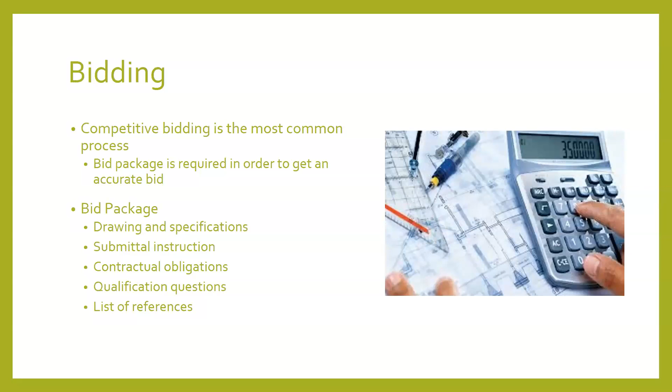Sometimes it's been a while since you've done a particular kind of project, but if you've got a list of those projects and who you worked for, people, if they're happy with your work, they're happy to give you a reference, even if it's been 5 or 10 years.

So these are some questions for you all. Who completes the bid package? Think about that. You've got the architect, a project, talked about that. And then now, who puts this all together?

Isn't it the owner? Owner and the architect? Yeah, good. Yeah, they usually work on that together.

Who solicits the bid? The owner. Yeah, same folks. So soliciting the bid means advertising it. So if it's a public project, there are requirements that it go out in a public notice, in newspapers, and then usually there's a time frame that it has to be advertised. That's the owner's responsibility.

And then what is the contractor's process? That's kind of a weird question. What do I mean by that? In other words, you as the contractor have seen an advertisement and you're interested. What do you do next?

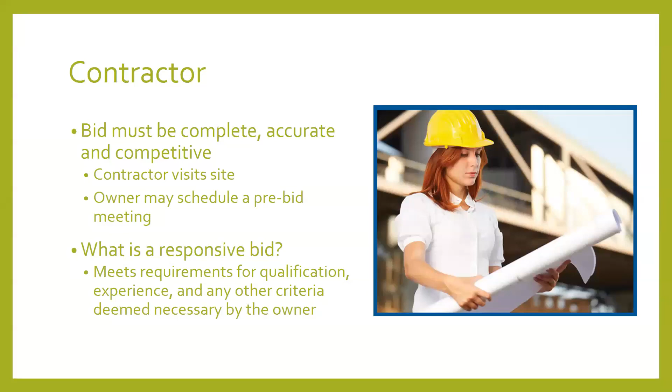Yes, definitely. Experience is another thing, you can't BS that one. Sometimes, on projects I've worked on, the contractor of record may not have all of the qualifying experience, but they'll bring on a partner who does. And that's legit, because it allows you to bid on something you want, and gives you that experience for next time. But you got to be upfront about that. You got to include that other contractor because they're going to help you get qualified for that project.

So how does the contractor go about finding a project? I think if you're a contractor here in Ketchikan and you're good, you won't have any issues finding work, just word of mouth. Yeah, that's a big one in Juneau too.

Press releases, the bid announcements. So I was mentioning that all public projects have to publicize in the newspaper or some other means, so keeping an eye on that's really important. Sometimes you can just find out what's coming up by going to the plan room, going to the CBJ, and looking at the permits that are out there. I wonder who's bidding on those, and keep your eye on it, especially if you're interested in moving into the commercial side of things — see what commercial projects are getting permits.

So yeah, reputation, building department. So how do you select a project? Ketchikan, Chris, if you're a contractor and someone calls you up and says, hey, I've got plans ready, I'm interested in having you build a house — do you take everyone? No, there's a number of reasons: timing, depending on what else you have going on, if it's something you're comfortable doing.

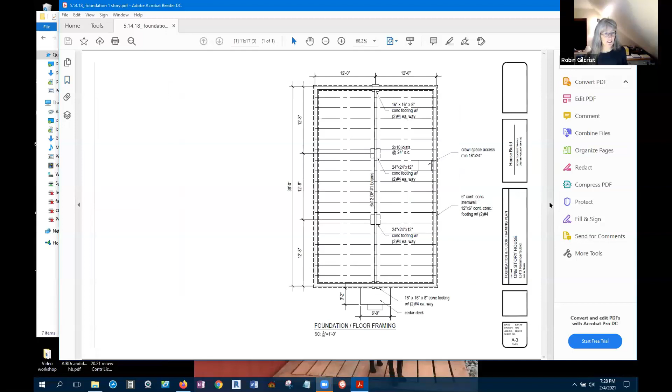Okay, dare I share my screen? I will give it a whirl. Here we go. I'm going to put it over on 1. Okay, so if I close that and close this, we can see a little bit better.

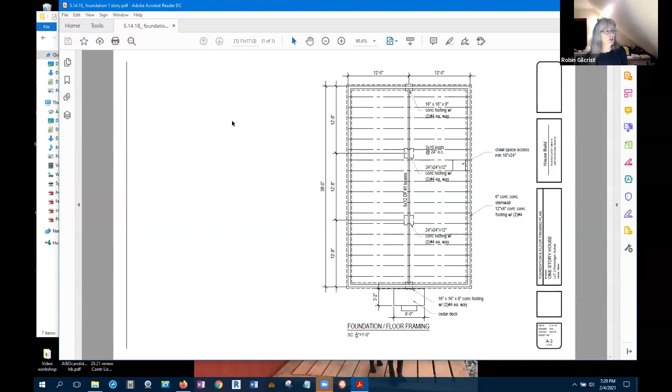Okay, can you guys see the foundation plan? Yes. Okay, so this is in week 2's folder, and you guys all said you found it. So you'll notice that the back here has 24 feet of width, and that's the same as on the floor plan. But what you'll notice is there's a dash line on each side, so that means the footing is sticking out beyond the edge of the house. We can either look at another drawing, which would be the details.

I'll scroll in a little bit more. So here is the line of the house. So this is the exterior line.

Chris Baldwin, I was talking about the way that we're doing things a little differently. We've got the foam on the outside, so this double line right here is the sheathing. It comes down, this is the rim joist, the mud sill, and this is the concrete wall. We're using insulated concrete forms, so it's insulated all the way to the exterior line.

So, look at the foundation plan. Robin, I can't hear you at all. It's choppy again. Oh, poop. Okay, stop the video.

Is that any better, Kylie? Yes, thank you. You're welcome.

So this line here, if we're looking down on the foundation plan, that point right there is the outside line that's solid. This right here, that point is the dashed line. So the footing is 12 inches, the stem wall is 6, and it's evenly spaced, so that means it sticks out 3 inches on each side of the concrete.

So if I minimize that and bring the other one back up, and zoom in a little bit, you can see that dark line is the edge of the building, the edge of the stem wall, and this dash line is the footing. So it sticks out 3 inches on all 4 sides. Make sense, you guys? Yes.

Okay, so that kind of gives you an idea of the basic size.

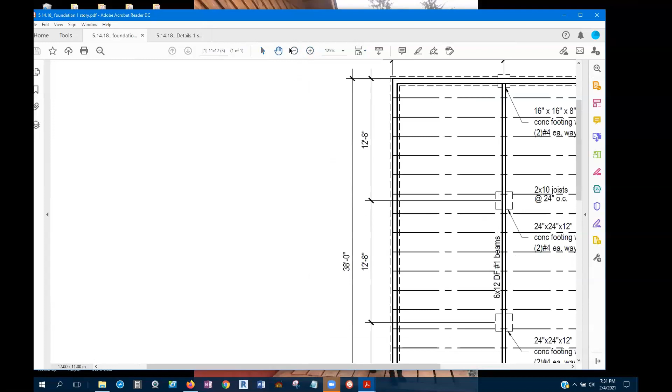And then the other thing to pay attention to is there's a bit of a deck right here. So anything that's attached to the house, the footings for this deck also have to go down 32 inches. So if you're thinking about working on this foundation, you don't want to excavate a hole that's just barely big enough for the footings, right? Because you've got to walk around and place the boards.

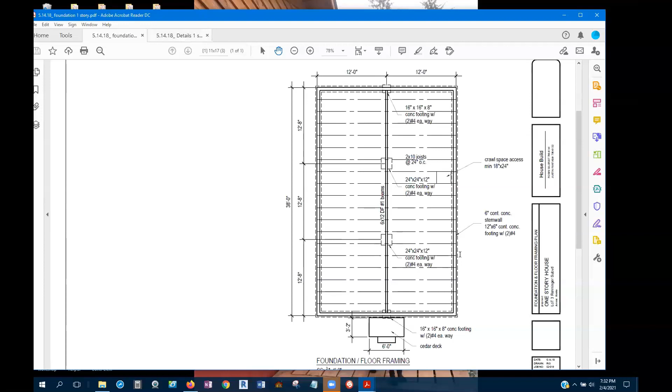Well, you've got to set up what they're called batter boards that allow you to do string lines to get the whole thing square. So you need a little bit of room for that. And then as you form the footings, you're going to have wood on each side here, so you want to have room.

So excavating is going to be bringing the dirt back and down. So when you're figuring out how many cubic yards of material you need, it's not going to just be the footprint of the foundation. Does that make sense? Yes, you're going to take soil away to give yourself an area to work.

Depending on the site, you can store some of that material right on site. If it's okay material, you can bring it back later and have it be some of the backfill here. But for now, what you're going to do is figure out how much material you're going to take out to get down to not just 32 inches below grade, but then how much compact fill do you think we should put beneath our footings?

I'm gonna just throw that out there. So you're gonna go down to soil, and then you're gonna put in some compacted fill. So that would be like crushed rock, smaller than that, but rock that is going to be compacted to give you a stable surface for drainage and also for the crawl space and then underneath your footing. So how deep would you make that? Any guesses?

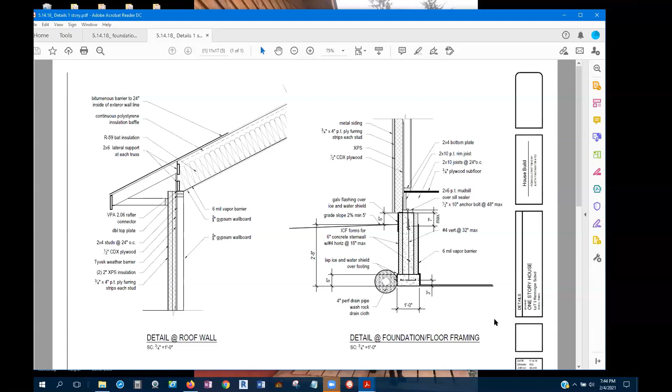Are you good with that? Sounds good, I thought for a moment maybe I got lost again, but I'm still with you. We're using the foundation plan to figure out these numbers, right? Correct. And that was 4 foot excavation and 6 inches, is that what you said? Correct. So that'll bring it back up to 3'6", which is more than enough depth for our 32-inch frost depth.

The only other thing you need to do this week is read chapters 11, 12, and 13, and answer the questions at the back of the book - the discussion questions. Since we're using edition 2, it's a slightly different format than edition 1.